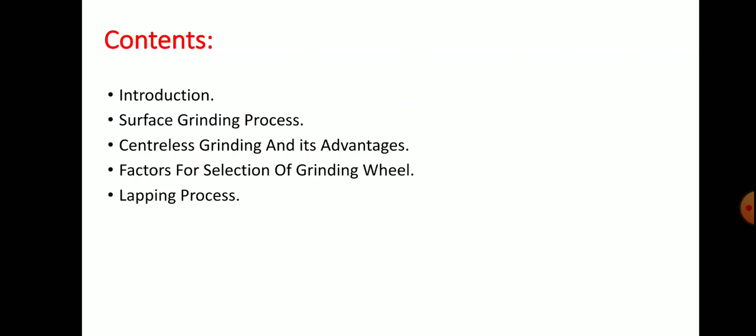So today we are going to start with the third unit, that is super finishing process, part 1. These are the contents that I am going to cover in this topic: introduction to grinding, surface grinding processes, centerless grinding and its advantages, factors for selection of grinding wheel, and lapping process. So let us go through this one by one.

So, introduction to grinding. Grinding is a process of metal cutting using a rotating abrasive wheel from the surface of the workpiece. It is a process of removal of metal from the workpiece by rotating the grinding wheel. Generally grinding is a finishing operation to get high surface finish and good accuracy.

Grinding removes very small material, about 0.25 to 0.50 mm. It is also carried out for machining too hard materials. Here the abrasive wheel used for grinding operations is known as a grinding wheel. The wheel we use for removing the material is also known as an abrasive wheel.

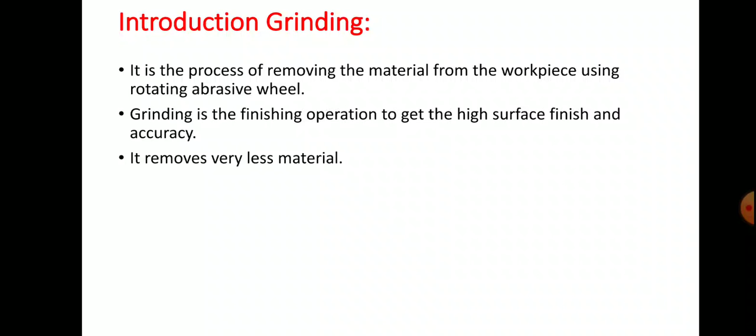Now let us see surface grinding processes. Basically it consists of four types. First one is horizontal spindle and rotating table. Second one is vertical spindle and rotating table. Third one is horizontal spindle and reciprocating table. Fourth one is vertical spindle and reciprocating table.

Now coming to the first grinding process, that is horizontal spindle and rotating table. Here we can see a workpiece which is rotating on the table, and here we can see a grinding wheel which is rotating in the horizontal axis. In this machine the grinding wheel cuts on the periphery of the workpiece and the spindle traverses horizontally.

Here the feed is given by moving the workpiece upward, which is mounted on the table, with a rotary movement of the table. This machine is used for round flat parts because the wheel is in contact with the workpiece for a long time. So this was about horizontal spindle and rotating table.

Now let us see vertical spindle and rotating table. Here we can see a workpiece which is rotating on the table, and here we can see the grinding wheel which is rotating in the vertical axis. These machines are basically designed for bigger capacity.

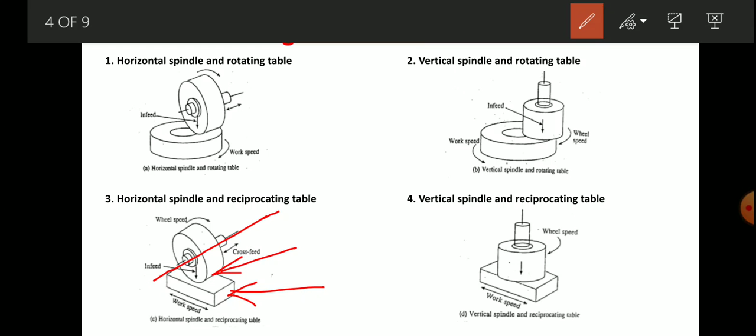It is the most common grinding machine found in the tool room. This type of grinding machine is commonly found in lots of industries. It is commonly used for high accuracy and fine surface finish.

Now let us see vertical spindle and reciprocating table. Here we can see a workpiece which is reciprocated in the horizontal axis, and the spindle is rotated in the vertical axis. In this machine, the cylindrical grinding wheel cuts on its side rather than on its periphery. The work is fed by reciprocating motion of the table.

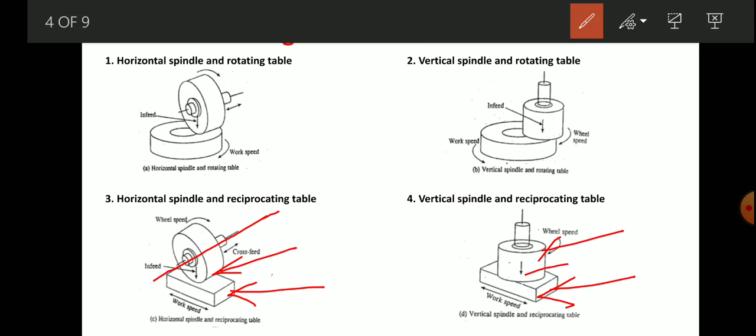The feed is given by a reciprocating motion of the table. Normally the diameter of the wheel is wider than the workpiece and does not require traverse feed. These tools are generally used for high production and remove a large amount of material in a single pass. So this was about surface grinding processes.

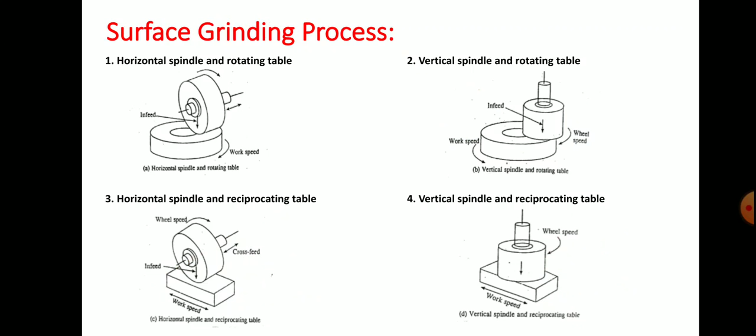Now let us move on to the centerless grinding process. Here we can see a simple sketch of centerless grinding which consists of two wheels, wheel 1 and wheel 2. The smaller wheel is known as the regulating wheel, and the bigger wheel is known as the grinding wheel. The workpiece is held in between these two wheels with the help of a work rest blade.

The center of the workpiece is slightly above the center of the grinding wheel. Here we can see the center of the workpiece is slightly above the center of these two grinding wheels. Here the workpiece rotates at the same speed as that of the regulating wheel. The typical work speeds are about 10 to 15 meters per minute.

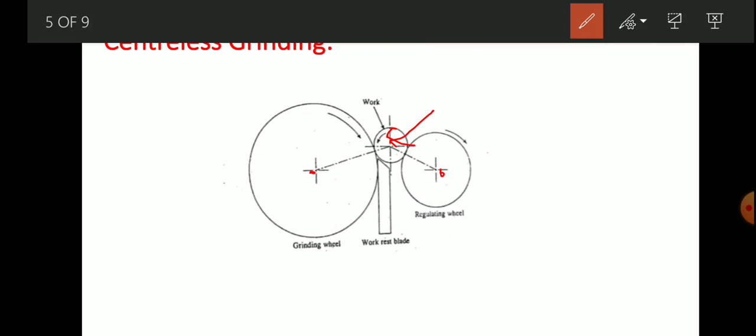In this grinding machine it is possible to grind the cylindrical workpiece without actually fixing the workpiece using centers or chuck. So this was about centerless grinding.

Let us move on to advantages of centerless grinding. The workpiece can be located, loaded and unloaded from machines quickly, and it permits maximum material removal. It gives minimum wear due to large grinding wheels. Grinding is almost continuous through feed grinding. There is no need for having and maintaining center holes.

So this was for today's session. We will continue the next part of the topic in the next session.